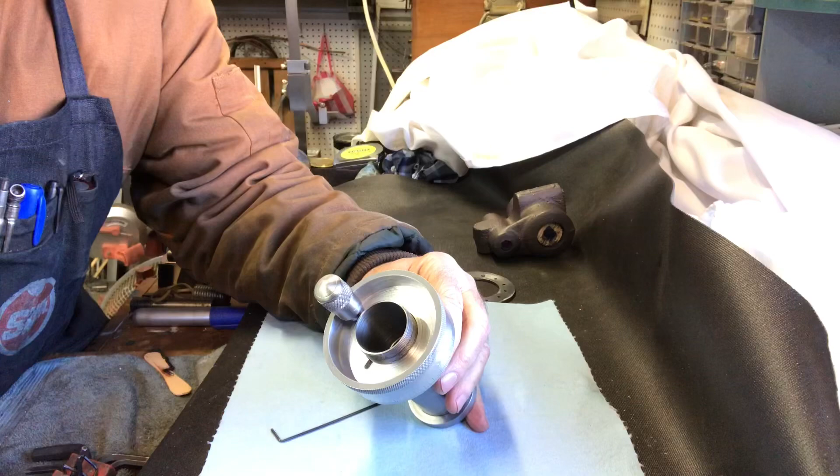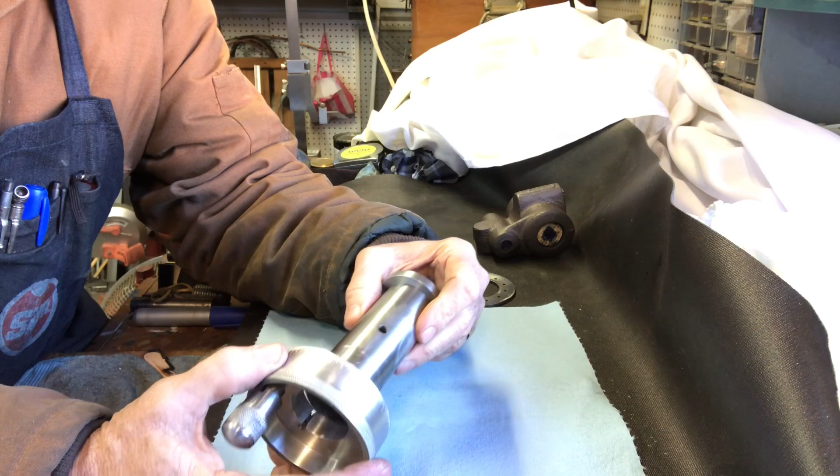Howdy folks. Thought I'd do another one of those start with the end in mind introductions for the 5C tool holder, and these are all the ancillary parts, some of which I've already documented the making of. I just wanted to touch them and cover what it all looks like together, so to speak.

So we've got the index plate here. I covered that in a previous video. That's the 1/8 inch steel plate. And then here's all the small parts that you're going to see made in this video: the plunger knob, and the index wheel. I keep calling this the index wheel, hand wheel.

There's the engravings. Hopefully that shows up. I'm trying to take advantage of the natural sunlight here.

Today is Martin Luther King Day, 2022. So I've got the day off from work, and I'll be able to get a little work done and think about his legacy for the entire world. Just a nice special moment, special day. If you were like me and you grew up in the 1960s and 70s, you understand what I'm talking about. So I won't belabor the point, but I did want to honor his memory.

Anyway, here is the piece, the plunger. I've got it put together. I had it loosely put into the index plate, hand wheel, so to speak. So we'll put that aside for now.

Let me point out one thing before I do that. The shoulder - this is how the parts will fit together - the index plate butts up against the shoulder there, and then there's that nut that I cover making in this video, that tightens it all up. And obviously I've left off the key, but I'll show that in the video too.

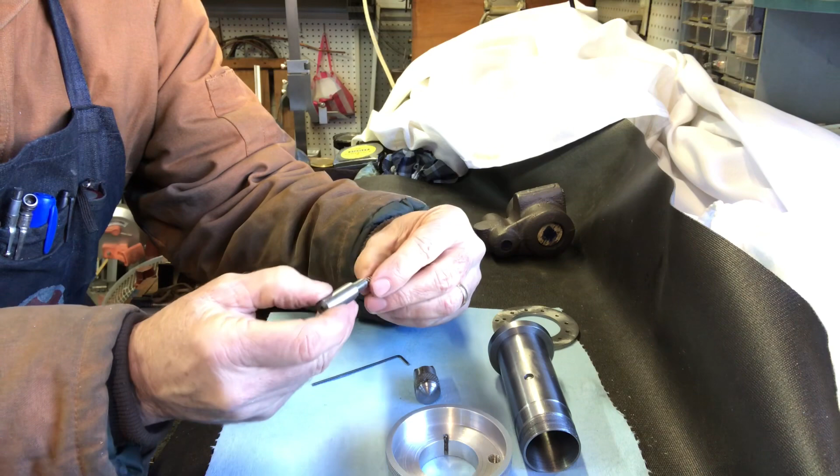The spring is from an ordinary ballpoint pen that just happens to be the perfect size. It just needs to be able to fit over the 1/8 inch drill rod here, and the outside diameter is less than the 3/16 inch sleeve on it. So that's how it goes together.

This all fits through. There's a shoulder inside here, if you will, and so the spring fits in. You put this together, and then you can use the 540 screw to tighten that down. So I hope that all makes sense. I just think it's helpful, part of the beauty of YouTube is to see how all these things fit together.

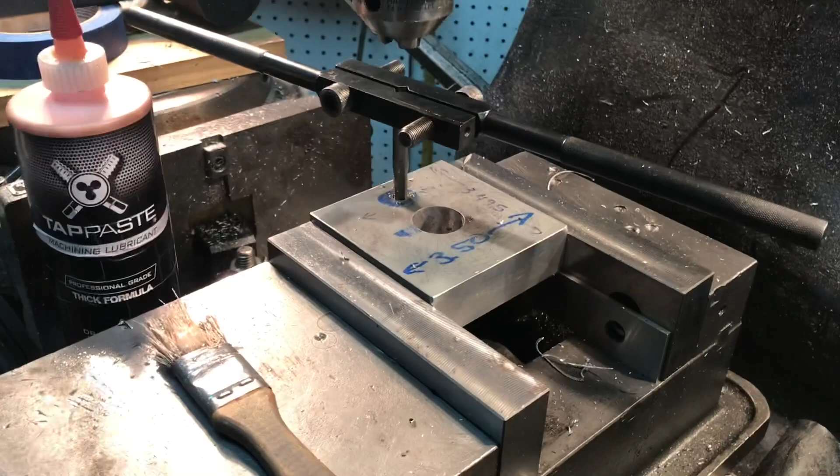Thank you. Okay, working on the index plate, or aka hand wheel for the 5C tool holder.

This is the piece of gray 1-inch thick aluminum that I got from Russ. I cut it down last night and milled it to about 3.5 by 3.5 square, and I've got it in the mill vise now. I've already bored out to 1 inch, which is the biggest drill I have, and while I still have the drill chuck in, I've drilled and tapped for the 5/16 24 thread.

I'm tapping it right now using my favorite tapping stuff, the Tappaste. So I'll get this tapped, and then I'll get the boring head out. I'll take the drill chuck out, put the boring head in, and try boring out the center portion. Then while it's still in the mill, the last thing I can do is mill a slot for the 3/32 inch keyway key slot that I'm going to use. So I'll get that all done over here.

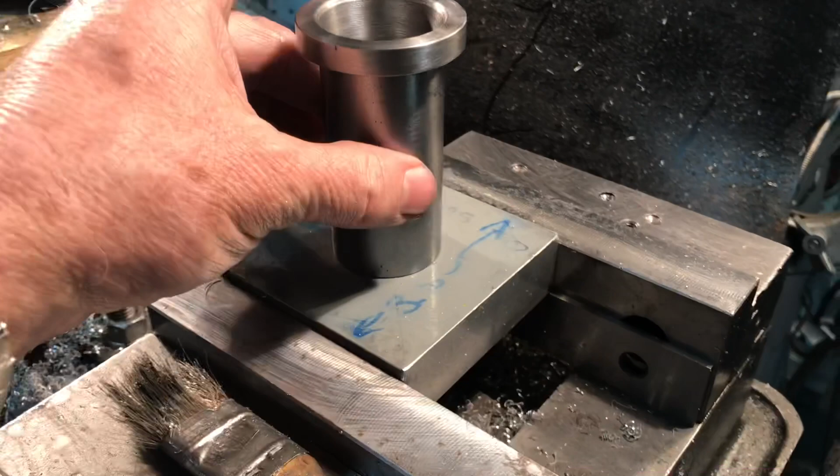Bore out the center of it, and then I'll be able to take it over to the lathe. Okay, I just finished boring out the hole here with my trusty ancient Criterion boring head, and I bored it out. This is exactly, I think 2 thou over, so it's just a nice slip fit.

The shoulder engages there. This is the 5C collet holder spindle, and this will hopefully become the index plate. Nice fit there—as you can see, it doesn't want to sink down, you have to kind of press it in. So it's a light press sliding fit there. When this thing gets machined all the way down, it'll be concave on the inside here, but so far so good with the process.

I'm going to take the small boring head off and put the big one on so that I can clear out a much larger hole. I'll tackle that in the next episode, probably tomorrow.

Okay, I'm going to try to shoot this left-handed, so I apologize in advance, but my idea is working okay so far. The 3-inch large boring head from Shars is working really nicely. As you can see, I've got it in back gear.

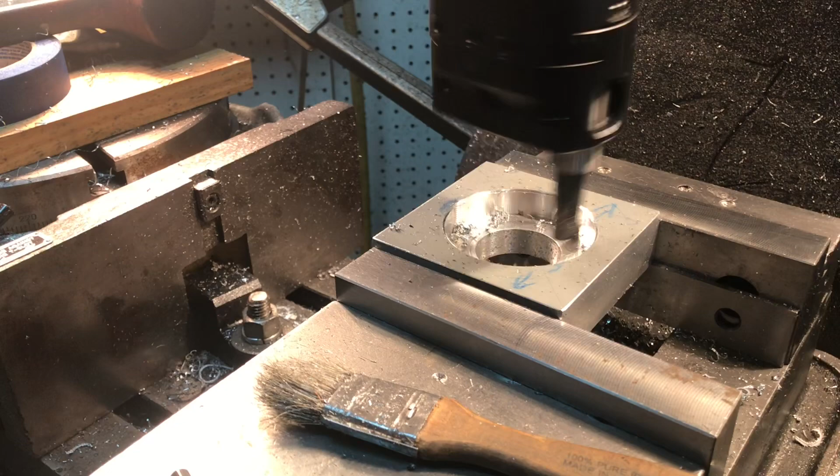I'm going really slowly, and the reason is the thing has quite a bit of mass and it vibrates a good bit. So what I'm doing is feeding it by hand just to go down to the 1/2-inch depth, about clear of the drilled and tapped part.

As you can see, I'm advancing it down about 10 thou. You probably can't hear anything, but it's making—and it was really bad—an interrupted cut while I was boring through the portion that's drilled and tapped over there. You hear it making a little chirping noise because I'm feeding it so slowly.

I'm eyeballing it with the quill DRO, and when I get just a little bit above about 0.498 inch, I back it off.

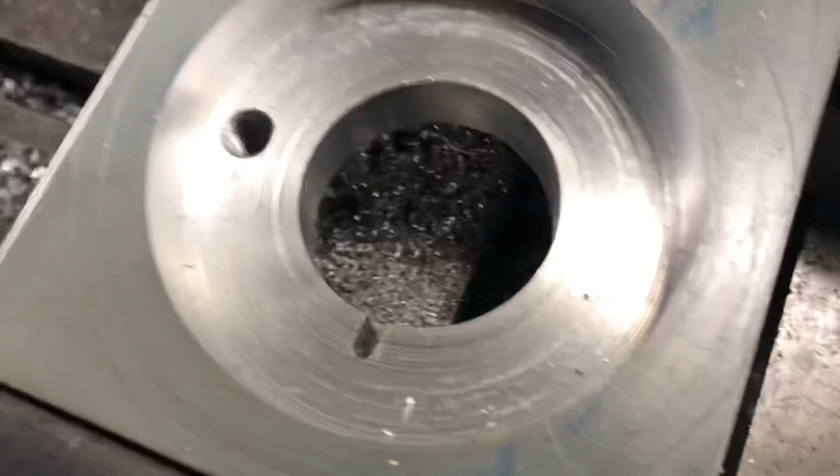I'm going to test fit that in just a second here, I'll show you what that looks like. Okay, so there's the 3/32 inch hole. I've just cleaned this up a little bit.

And here is that half-moon key I was talking about. It's not Loctited in place or anything yet, it's just pressed in there, so it might flop loose while I'm trying to test fit. I really haven't successfully test fit this yet, so you get to see it.

There we go, look, it works perfect. Very nice, shake-free fit inside there.

So now my game plan is that I'll be able to mark off the corners here, cut them off on the bandsaw, and then put this in the lathe and turn the outside of it round. There we go. Thanks, Dan, for a great suggestion—I think this is a lot better than the round key idea that's on the original drawings.

So I'll keep you posted as we go along here.

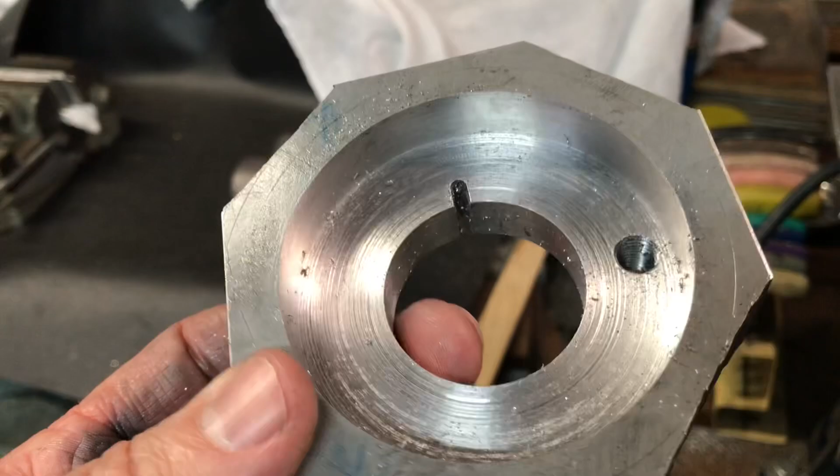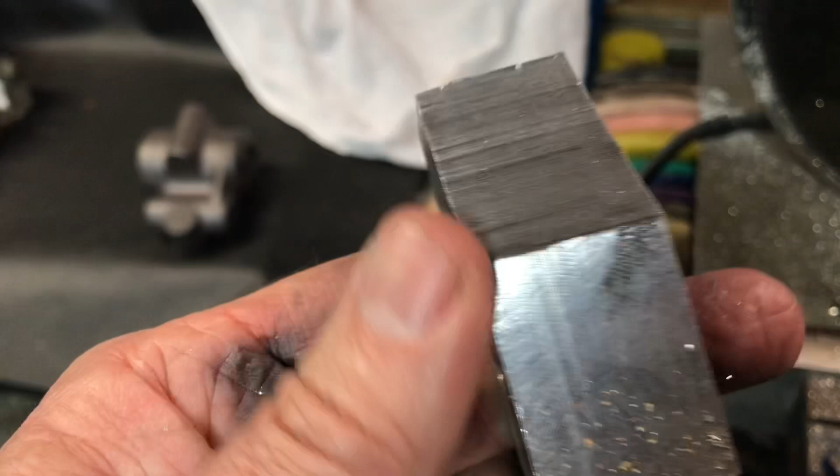And here is the index plate in progress with the corners cut off on the bandsaw. There are the little corners that I cut off. I need to take it to the belt sander, smooth these edges down a little bit, deburr it, and then the plan is to put it on the lathe on the 3-jaw chuck and expand it.

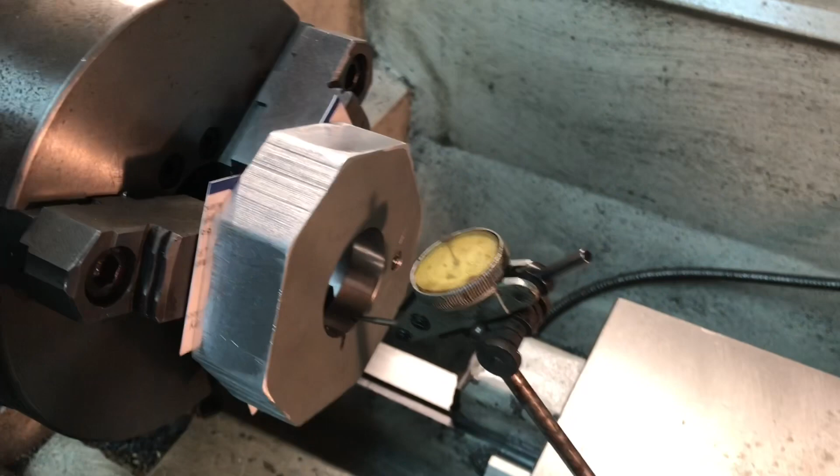Just to show you the setup here, I've got the index plate blank with the corners sawed off, and as you can see I cut up a little business card to use so I can machine these right to the edge there. I'll do that the last thing probably. But I also wanted to make sure, even though I'm using a 3-jaw, I took extra pain to... oh, that's where the little lip is, darn it.

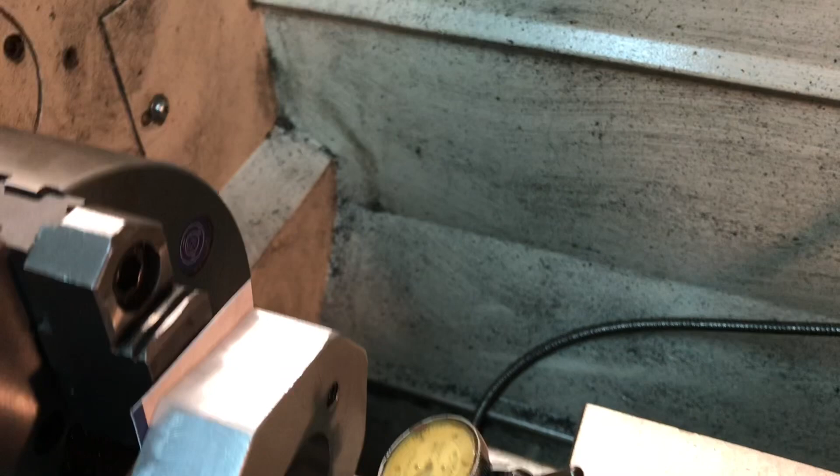I keep getting it in the valley there. But I've lined this thing up to make sure there's no run out, to make sure it's as aligned as possible. You can do that with a 3-jaw. Get it in, tap it if you need to a little bit. And this 3-jaw that came with my Grizzly lathe is pretty accurate, so I'm pretty happy with this.

This doesn't have to be super perfect accurate on the outside anyway. The degree marks will be on here, but the basic idea is to turn this down to 3 1/4 inches overall, and then 3 inches in diameter that will go up against the back plate, and that's the part that will get degreed. So I'll bring you back when that's good.

Here I am taking off a little bit, rounding it a little bit. Got the auto feed going. I love the auto feed feature on my lathe, and as you can see, interrupted cuts are terrible, really murder on your tool. So I've got a high-speed steel tool in there for this aluminum, one that I made years ago for my shaper.

It's like a rounding tool. Hang on a second, I'll pull this. I'm trying to go in as close as I can to that paper using my DRO, to go right up to just about 1 inch, which is the thickness of the aluminum. So I want to get as much rounded as I can. Realizing I may have to reverse it, so I'll show you the DRO.

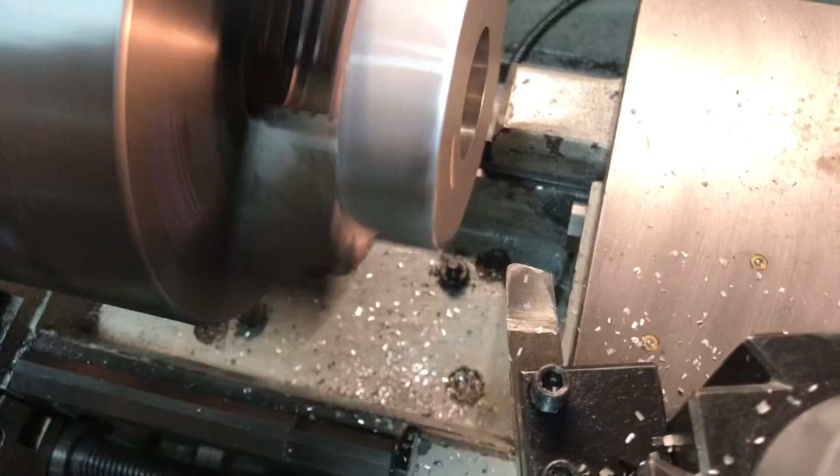Let's go, I'm going to go right up a thou away from the edge there, from the paper. Okay, so take it out, I'll show you the high-speed steel bit going around, and then we cut the motor off, and you can see how round we are so far. There you can see we've taken some of it off. I'll keep working on this and bring you back when it's pretty well round.

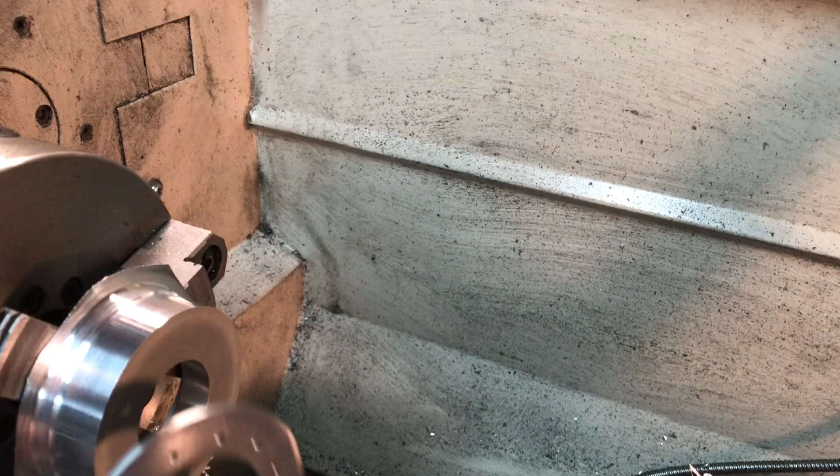Okay, so that worked out pretty well. I got this part down to 3 inches exactly, and I left a little rim here, as you can see, that will be up for the knurling. I'll just have to reverse this around, but I want to show how that fits against the back plate. It's a perfect fit, so very excited about that.

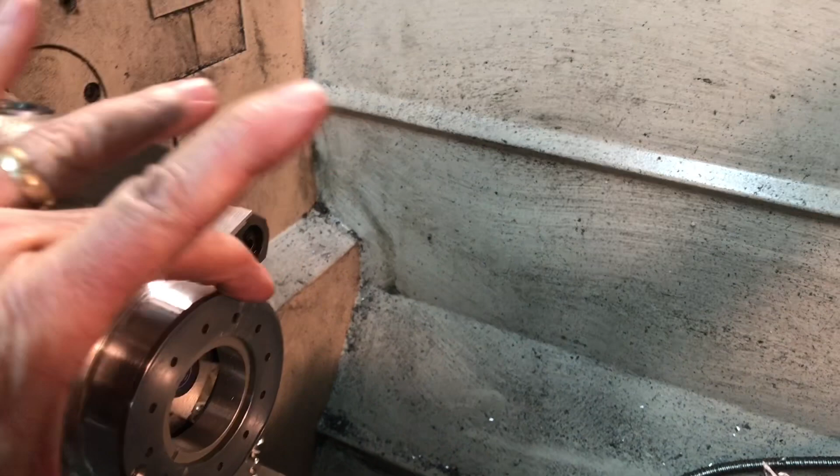This is the part that will get degreed here. This part will get knurled, and this remaining little flange part will get turned off. I'll do that tomorrow. Alright, so here I've flipped around the index plate and put it in.

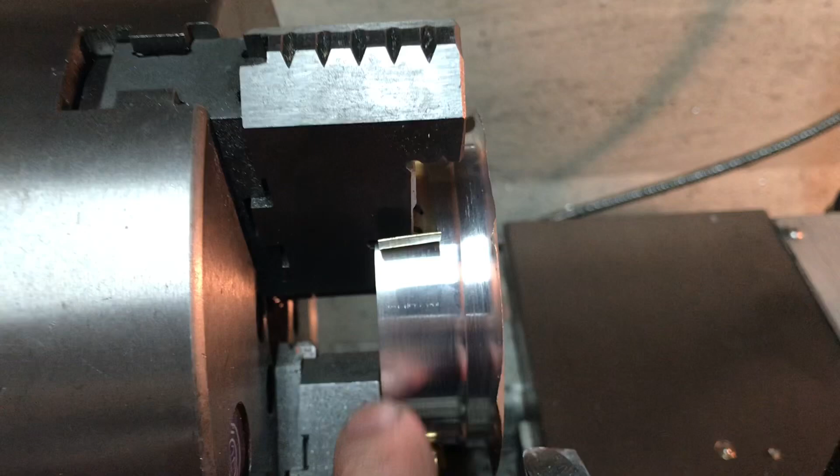As you can see, since I'm using aluminum, I put it in very carefully with some brass to protect the aluminum inside the 3-jaw. I reversed the jaws around so I could grip it this way, and I'll cut this, basically what it is, a flange. I'm going to reduce this off so that I can have the raised part that's hopefully going to be knurled. Have that clean. I wanted to show this part.

I had to get a little creative with the setup. For my little homemade knurling tool here, I did not have the side clearance that I needed to get in tight on this index plate, aka hand wheel. But I'll show you the setup. So I had this old Armstrong one, which still had a little life left in it, and I just clamped it to my tool post and have been running it this way. Put a little lubricant on there.

Turn it back and forth a little bit. I wasn't sure it was going to work, but I'm pleased to report it actually has worked pretty well. Rotate this, let it run.

I fed it in really gradually because we're talking about an aluminum part here. As you can see, it's barely held on. I've got little brass grips there to protect the aluminum from the vice jaws. I'm being really careful with how much I feed it.

If you can see that very well, but it actually has a really good feel. Really nice knurl there. So I think that's going to clean up good. Pretty excited about that. I'll probably put a little wire wheel on it.

Let me back this off and wire wheel it real quick. Got a little brass wire here. Kind of clean that up, see what it looks like.

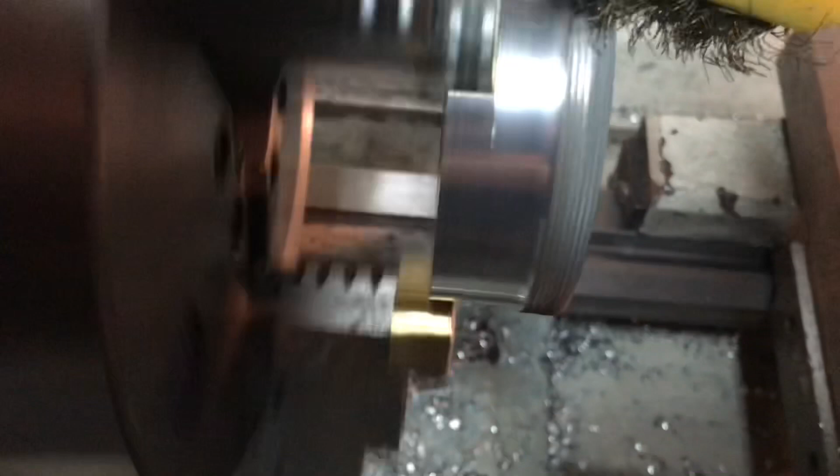Turning the lathe slow. They kind of have an odd setup like this. You use 70 RPM. I might have to file that a little bit. We'll put a little sandpaper on it. Let's see what it looks like now.

Yeah, I'll put a little sandpaper on it just to clean up the knurls, polish it up a little bit. But that feels good, man. I think it's going to work out good. Pretty excited about that. So here we go.

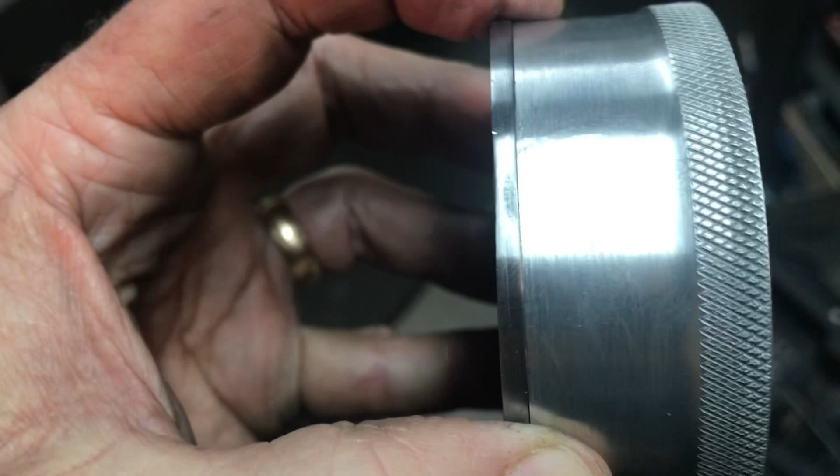I wanted to show a couple things. I've got the steel back plate stuck up against the index plate. First of all, it's a really nice fit. Sorry about flipping the camera around like that, but I got the ODs just exactly right. Of course it's not fastened to anything yet, but I'm really happy that the center came out lined up like it did.

If you can see the hole here and the through hole for the spring point, it's a little difficult to see I guess. But anyway, that's I think the beauty of doing this stuff in the DRO.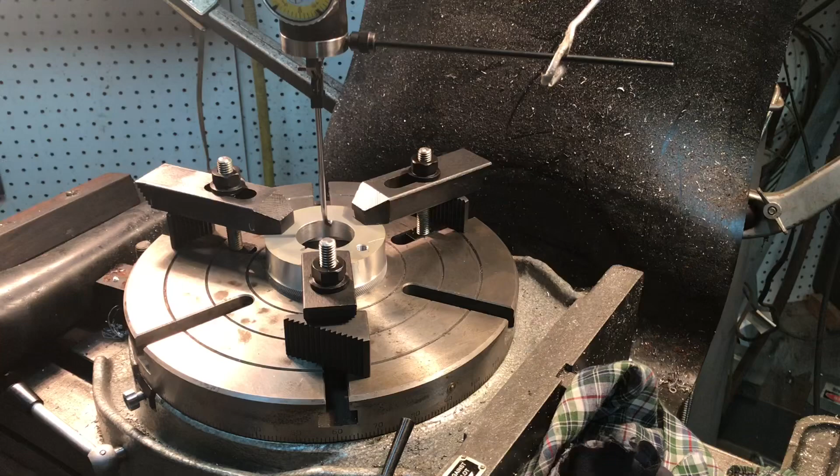Just want to show the setup real briefly before I put the index marks on the index plate. First I used my coax indicator and I carefully centered my rotary table. And then I put the index plate on it, and I offset it 1 1/8.

I used a tap held in one of the R8 collets inside the mill to set the offset here, and then carefully measured on either side, first with a Starrett rule, and then using dial calipers to get my plate roughly centered. Then I use the coax indicator, as you can see here.

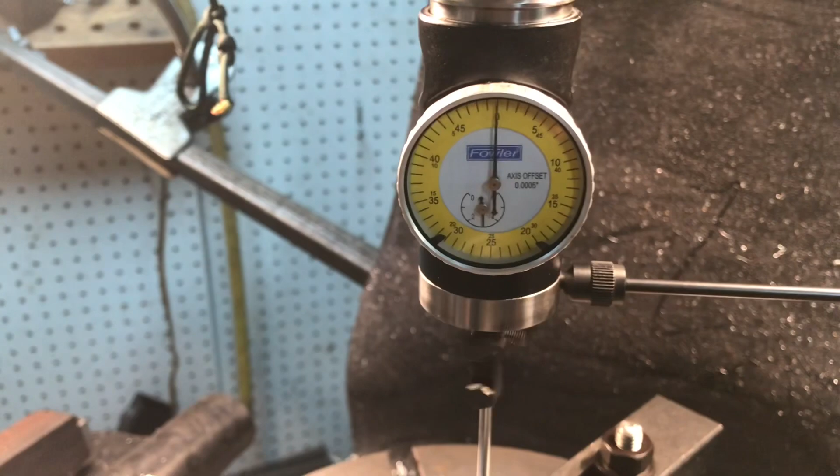Let me just show you real quick. So I'm indicating it, and I'm within, each tick is a half thou. So I'm within a half thou.

It's hard to tell because I've got the little slot for the keyway, the little half moon key. So that's what's making it jump around a little bit, but I'm lined up within a half thou. I think I'm good to go.

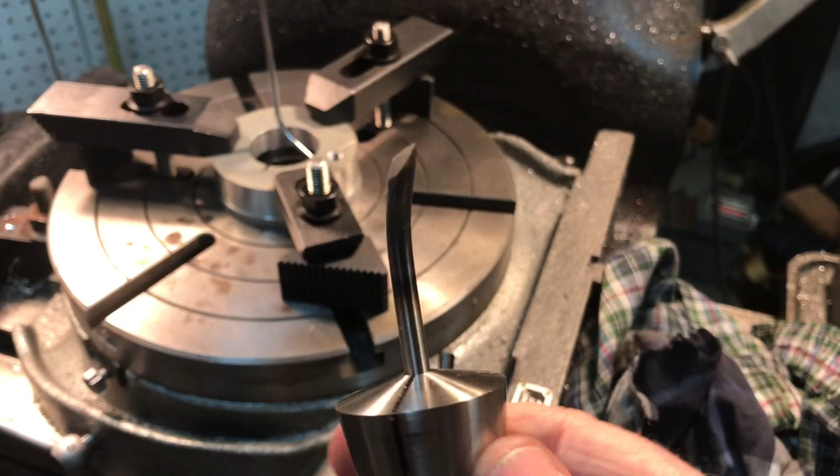I've tightened all this stuff down. Really happy about that. And I sharpened my scriber. This is the same piece of 3/16 inch drill rod that I had formed and hardened before. I used it on my George Thomas rotary table, and I've used it on several projects since. So I've sharpened this up. I've got it ready to go. So I'll put it in the mill, and I'll be ready to do my degree marks on the index plate for the 5C tool holder.

Now I'm almost halfway through indexing the index plate. I'm at the 165 degree mark. You probably can't see that, but it's coming along really nicely. Just like the other one, I did an 1/8 inch long, 125 thou for the ones, 3/16 or 188, 190 thou for the 5s, and then a 1/4 inch, 250 thou for the 10s. So I thought I'd take a shot of this.

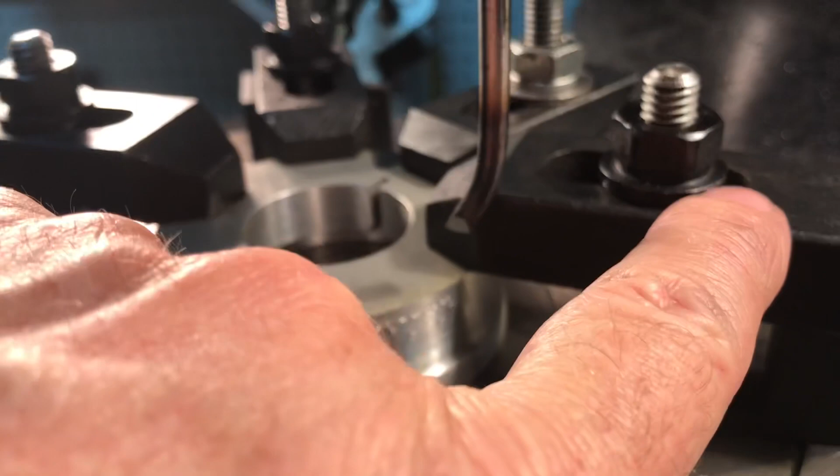I've moved the clamps a couple times and I'm getting ready to move this one over here so I can continue on around, but it's coming. It hasn't taken forever. I was really hoping I could do this in the daytime, but it's a rainy, cool evening out here, so I'm just methodically working my way around.

Okay, here's the finished product. I'm going to leave it in there in case I think of anything else I need to do, but I've gone 360 degrees. You can see that 359 is the last one I made. So I think it came out good.

One comment I wanted to make is, as you're cutting these, one way you'll know, especially if you have a springy type cutting or scribing tool like this—it may not be so important with other types, but with the springy ones, I do have to crank the cutter in. Maybe you go about a third of the way around and have to kind of tighten it up, so to speak. Bring the table back this way, maybe a thou or something. You can tell, you can just kind of feel it as you're making the cut.

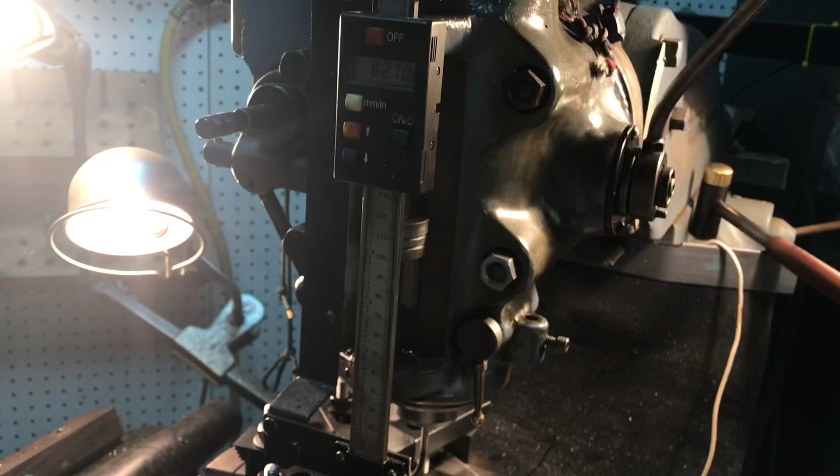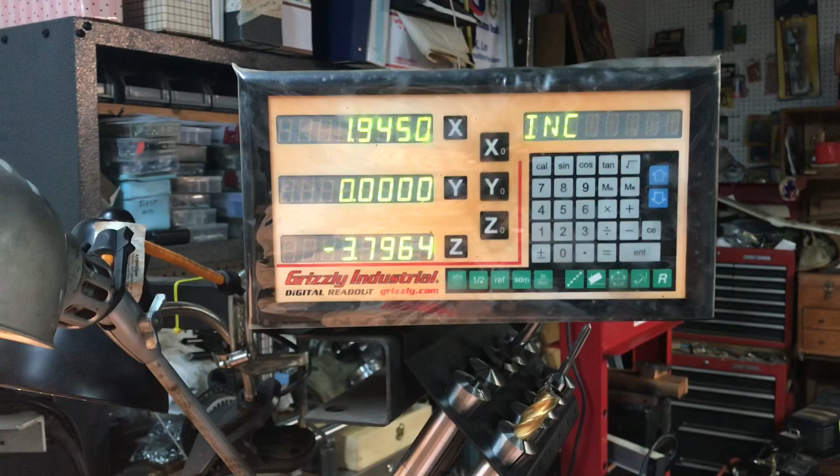Let me back out a little bit. This is how I do it. I bring it down, and I'm watching my DRO, and you can just feel if you don't feel much resistance. After about a third, I think a little spring gets imparted into the tool, so just tighten it up on your DRO just a wee bit. I probably, over the course of the whole thing, tightened about three thousandths. I think my offset was 1.948 when I started, so I probably tightened up three thousandths that way, if that makes any sense.

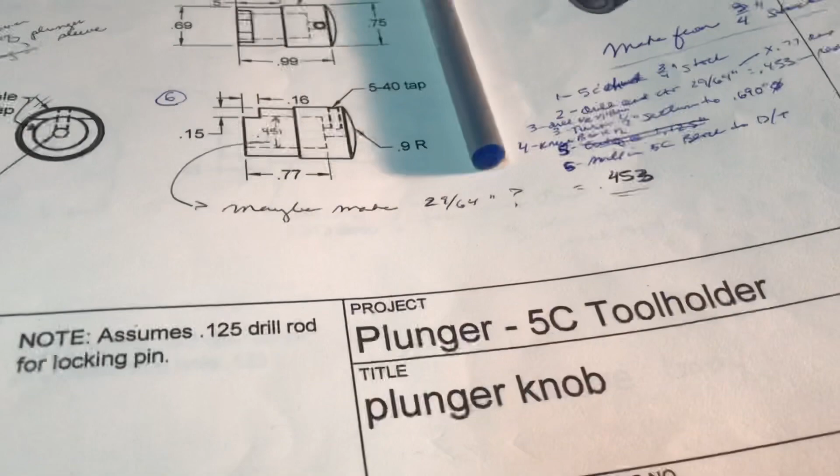Hey everybody, I'm working on the plunger, the knob for the 5C tool holder plunger, and as you can see, I've basically got the piece of steel formed. It's 3/4 inch steel, and you turn this part down to 690, knurl this part, and I turned a stub down here for future machining. You'll see that in a minute.

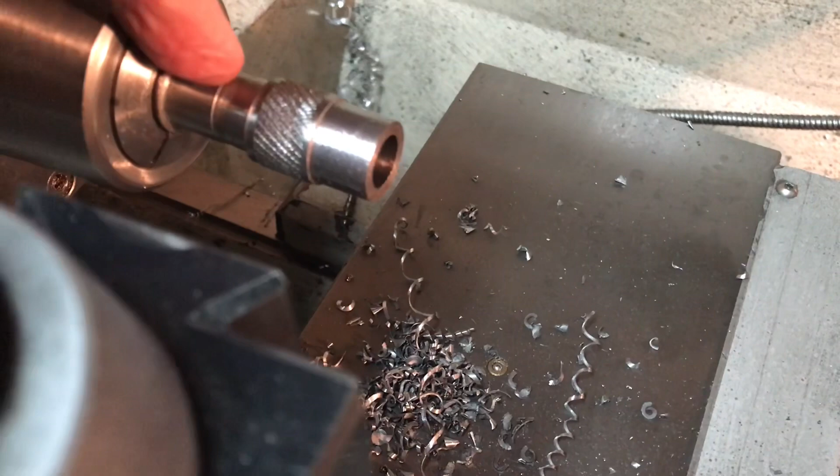I started drilling out the hole, and it called for a strange dimension, 451 thousandths, and I don't have anything that size, and I don't have a boring tool that tiny. So what I decided to do was use 29/64. I drilled it out, and since the dimensions call for a flat bottom there, I went ahead and made a flat bottom drill.

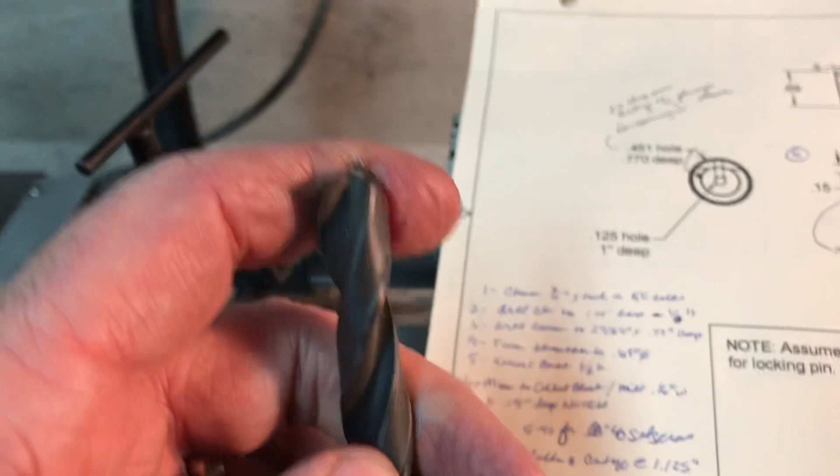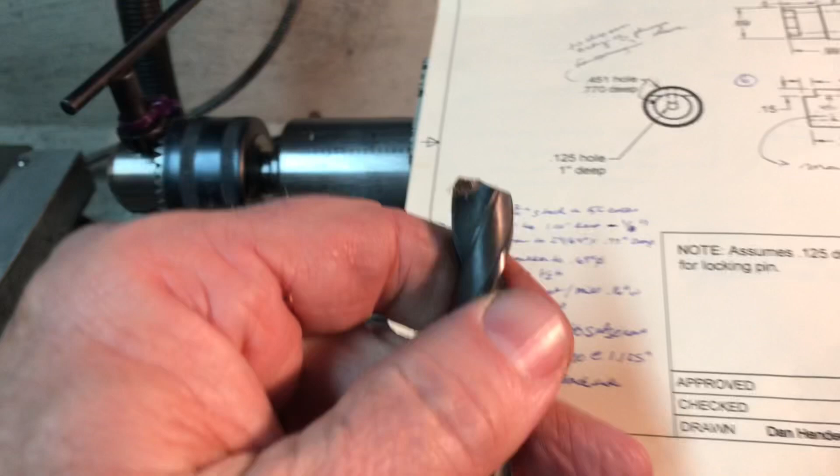If you've followed any of my videos on making the brass parts for the steam valves for my locomotive, you'll notice I have some videos about flat bottom drills. This one's not perfect, but it'll get the job done. So I'll use that, and it'll add to my collection of flat bottom drills.

Okay, just about done with the plunger knob. As you can see, I've cut the notch in the mill here, and drilled and tapped the 5-40 hole here for the set screw. If you're wondering, you can get 5-40—they call them 1/8 inch 40—set screws in packs from Harbor Freight. I was surprised to find that, but very pleased about it. It's not a custom order McMaster thing anymore. So I got the notch milled in.

Next thing to do is take this out, put the 5C collet back in the lathe, and do the cutoff and round the back of it.

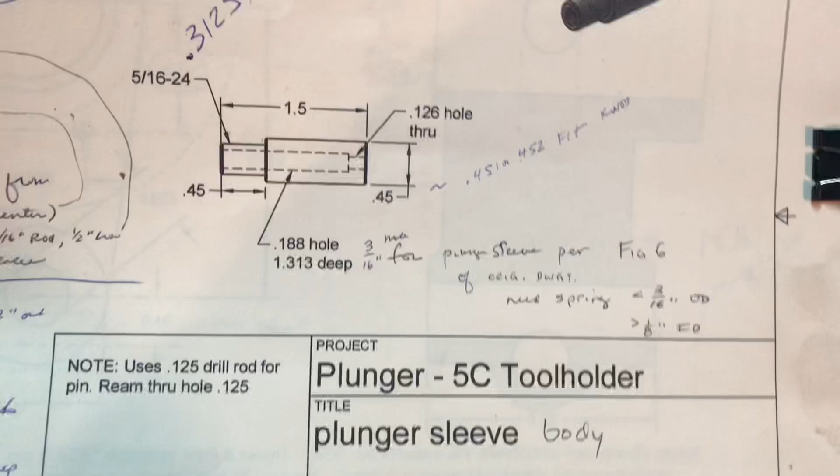Okay, about halfway through making the plunger body. Pretty simple part. I just got done turning the outer diameters, and I've threaded the 5/16-24 part there using my little carbide external threading tool. Next thing will be just to drill it out and part it off.

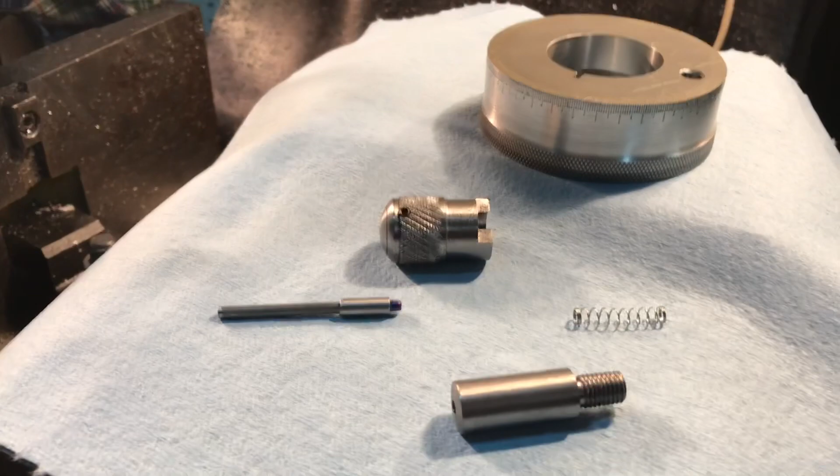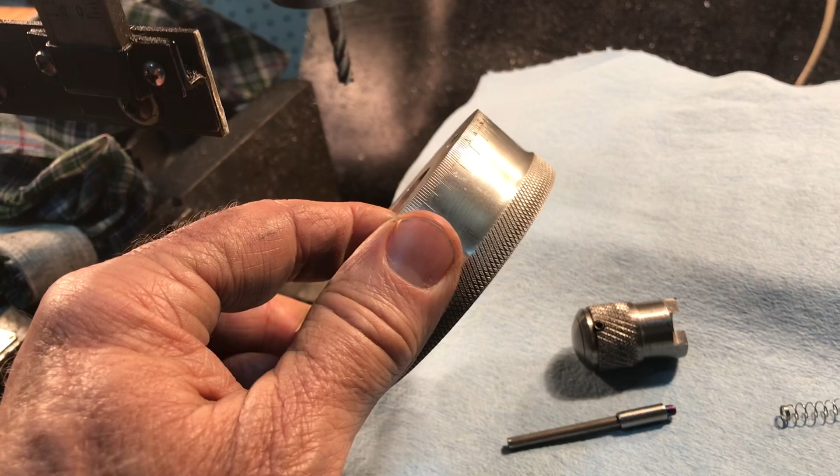Hey, I'm going to wrap it up for the evening and go in, and I'll show how this all works together tomorrow. But here's all the parts for the index plate. Here's the nice indexing done, it came out really nice. I haven't even buffed this out yet—I just barely ran a file over it to knock off some of the high spots with the index marks. But that came out good.

I've got the little plunger knob, and the Loctite is drying on this—I used the green Loctite. This is the part that will go through the index plate itself, or the back plate. And here's a little spring that will be used.

So I'm going to let this dry overnight, and I'll show the assembly tomorrow, show you how it all works, and then I'll get started on the actual cast iron plate—the cast iron tool holder.